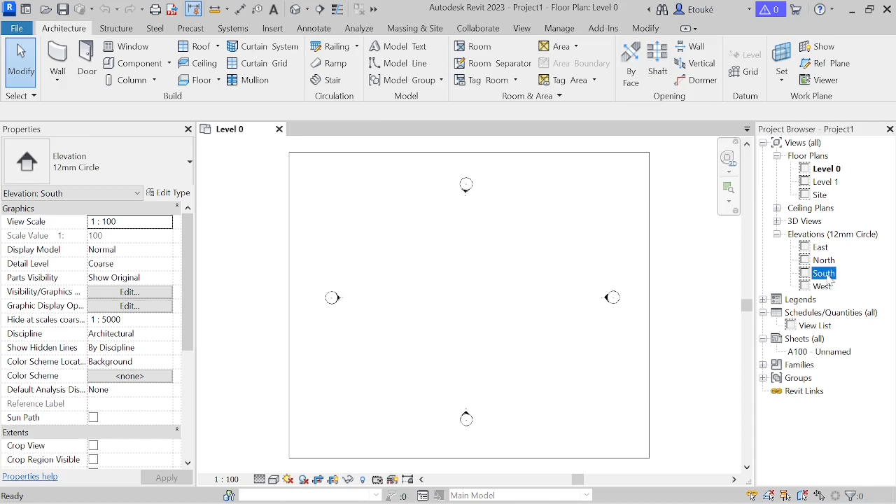So let us start. We will click on not open but a new project. So we will click on OK, and we will just wait a little bit so that Revit can be ready. So now our workplace is ready. What we will do is go to the side view like we used to do, and here we already have 2 levels, and we will add some levels for the slab and for the ceiling.

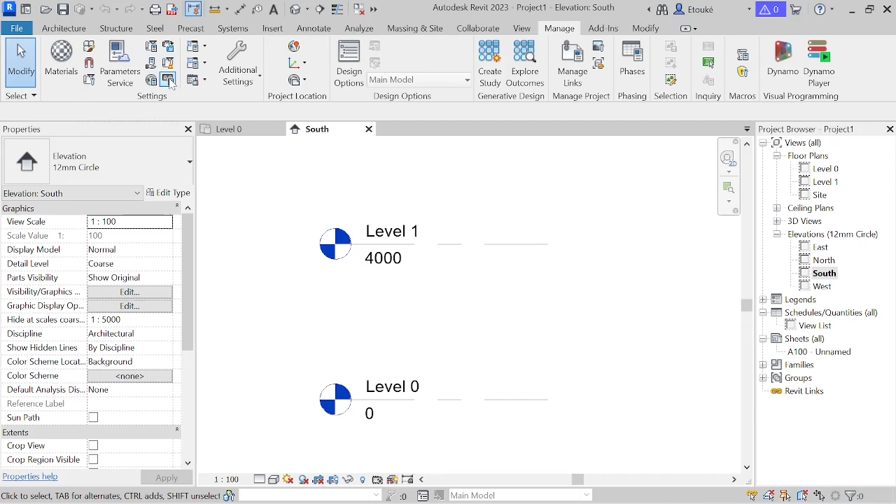So like I used to do, I will change this distance and bring it in meters. So we'll go like we used to do in project units, click on it, come here at this point and change it to meters. So we click on OK and OK again. Now we have it in meters, and we will put some more levels. This distance we can also change or leave it like this.

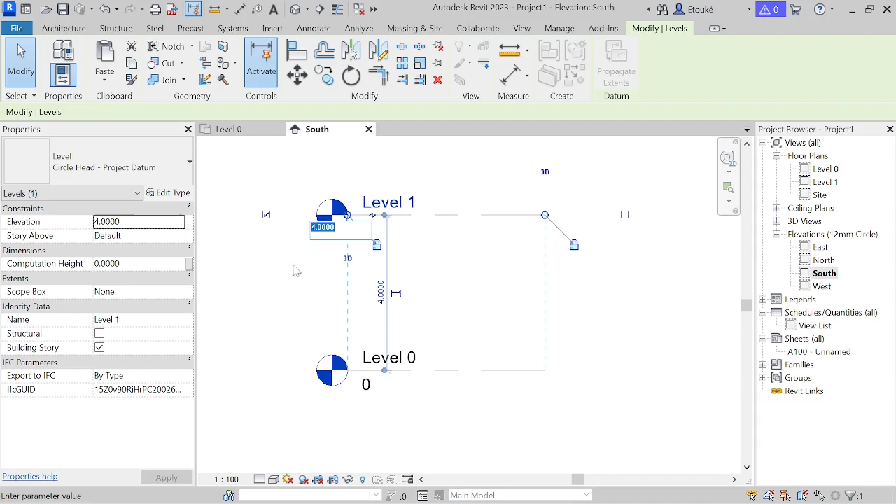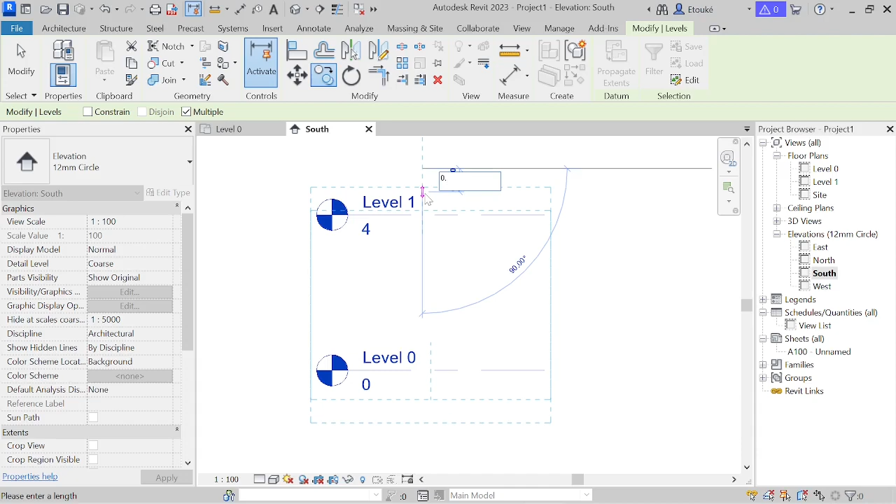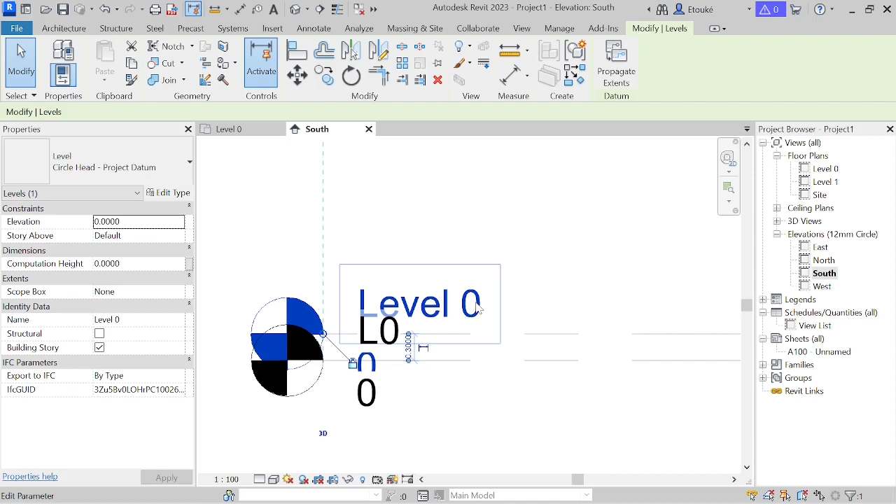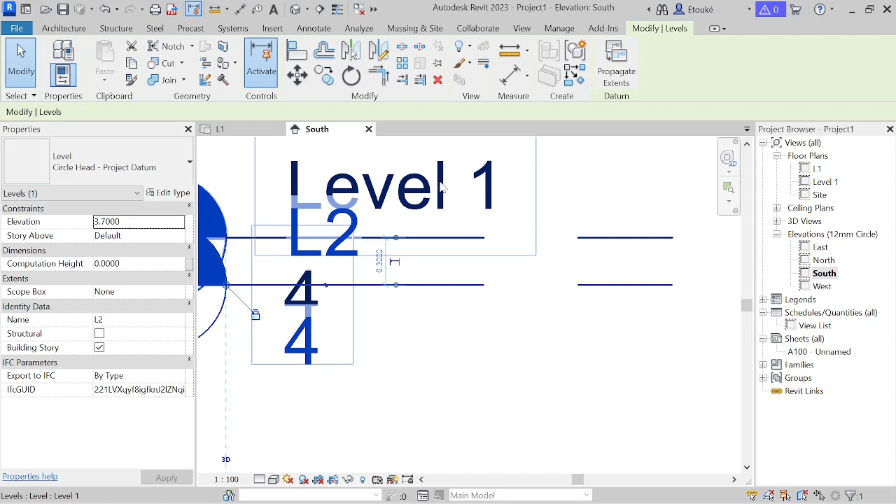And what we will do is copy the level, and we will make the place for the ceiling, so that we can have 0.3, and we click on enter, and we can go out. Now we can also change the name of these levels. So we call this one L0, this one L1, the one here L2, and the next one L3, enter, and now it is ready.

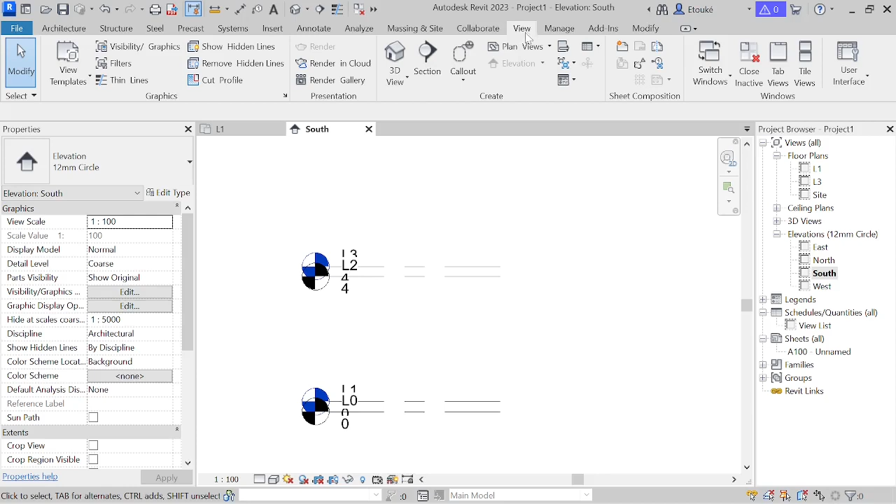So now we can check our floor plan to see if we have everything we need. If we don't have it, we can go to view, click on plan view, and see what is missing here. Yes, now we can see we are missing level 0 and level 2. So we choose the first one, level 0, click OK, and we see our level appearing here. And do the same for level 2, click OK. We also see our level 2 in this place now. So we will close this and check what we have in the side view.

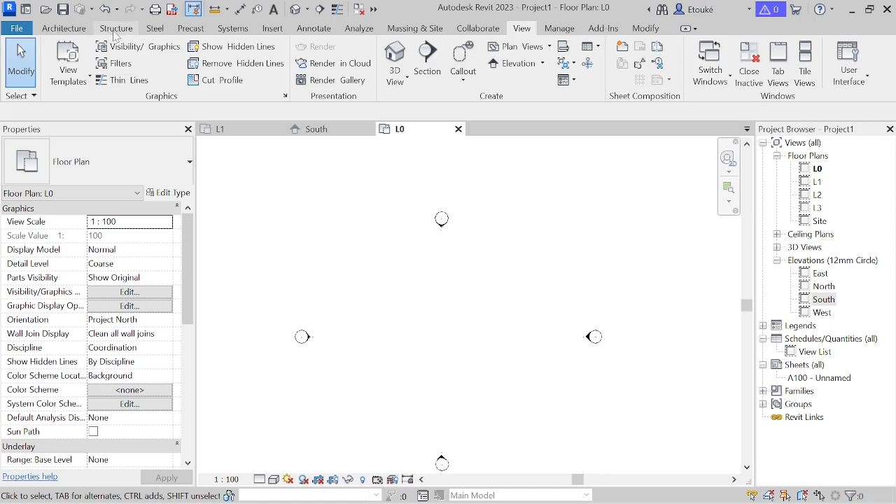So we can go to level 0 to start to design. We will start with the slabs, so we go to structure and choose the slab. We click on the slab and choose the way we want to design it. We want to use the rectangular mode, so we click on it, and then we come here and give our size. We want our slab to be 30 centimeters thick because we defined 30 centimeters in the level. So we will put 0.3 to define our slab.

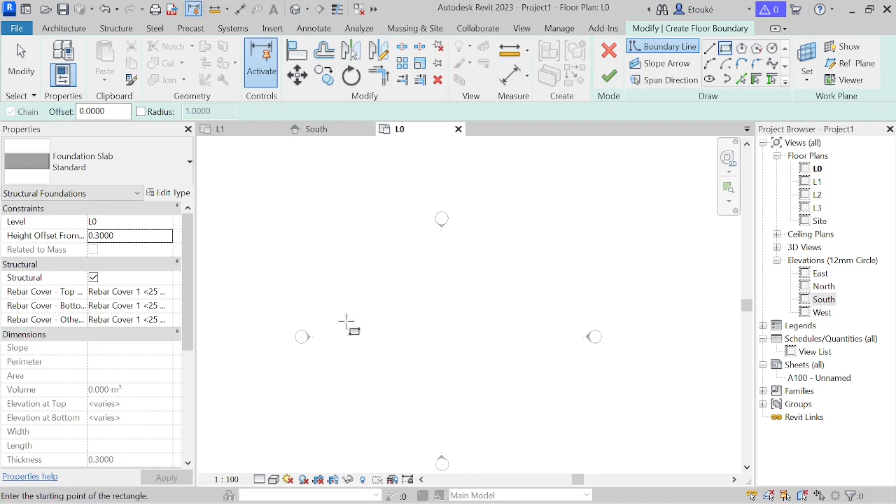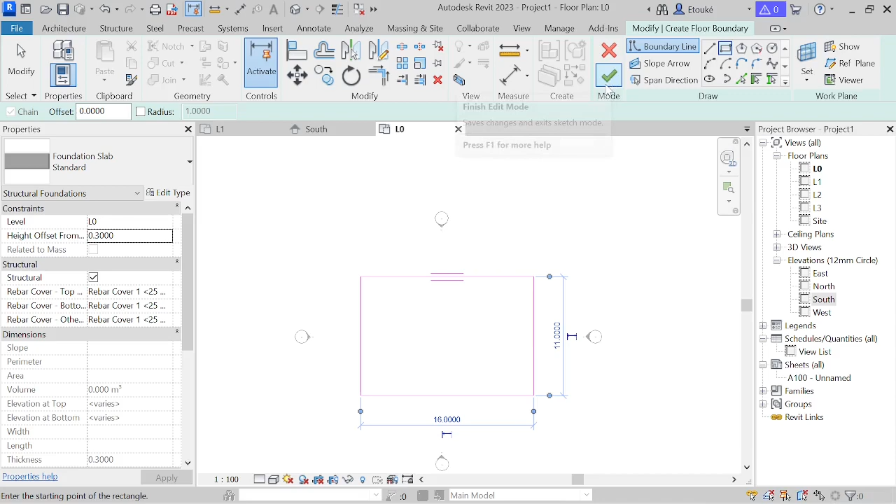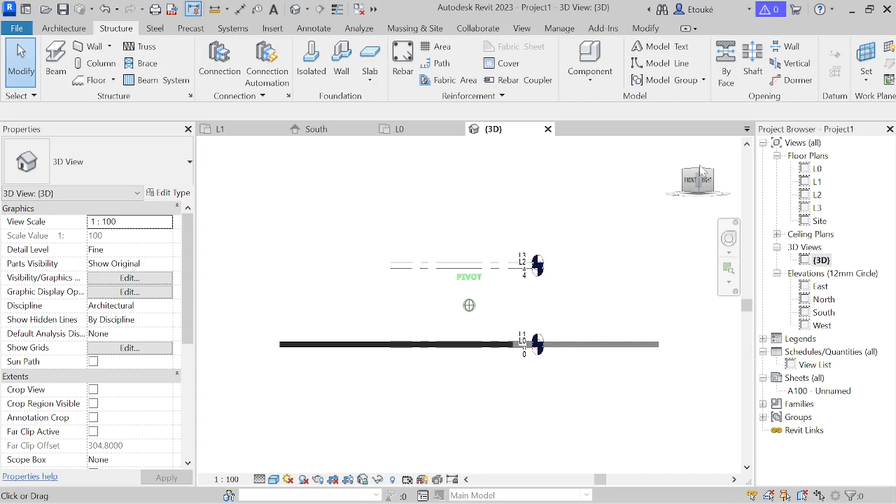So now that we are ready, we can start to design. We can draw here, and when we finish, we can click on OK. So this is our slab. Now that we finished our slab, we can check in 3D to see if the size is okay. So we open the 3D view, and we can check that it is correct. You can also check here, and we see everything is in the place we needed.

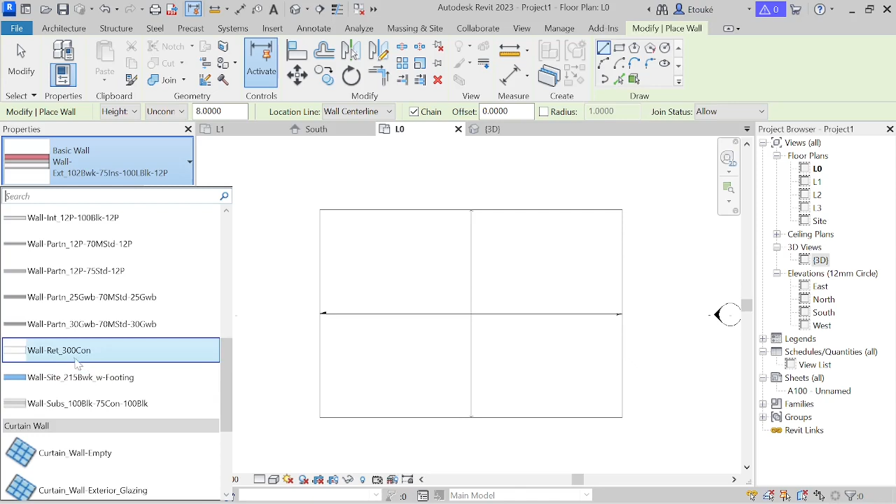So now we go back to level 0. It's time to design the wall. So we go back to architecture and click on the wall, and we can change the material we are using. That means we will choose concrete, the material we want to use. And now it's time for us to choose the connection. That means we want our wall to begin on level 1 and to finish at level 2. So this is what we want, and we can plan it like this.

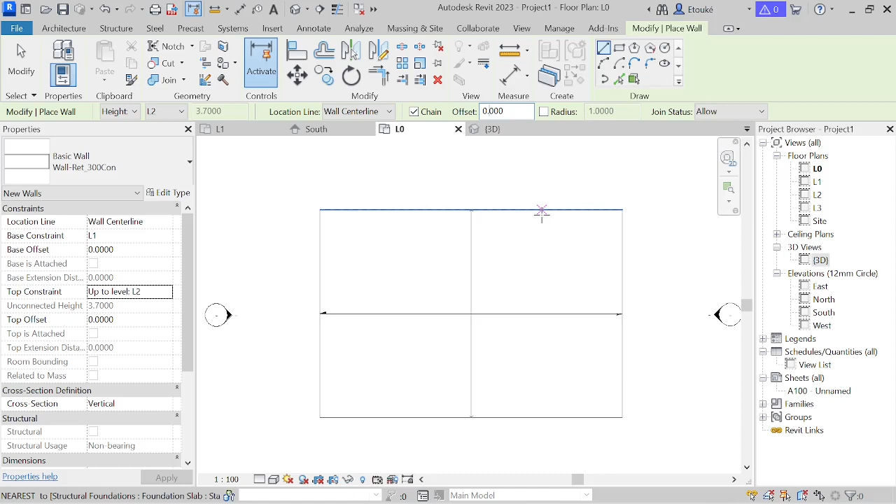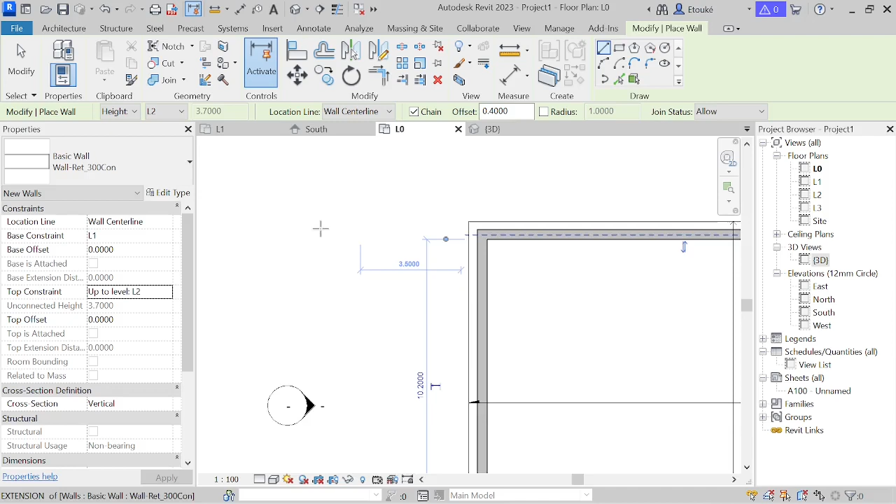And before we start to design, we can make a little bit of space between the slab edge and the wall. So we will give here maybe 0.4, and we can start to design. You see, you can have it here like this, and this place, and we can close it here. So now we have our wall here, and when we finish, we can check in 3D. We can confirm everything is okay, and we go out from the function.

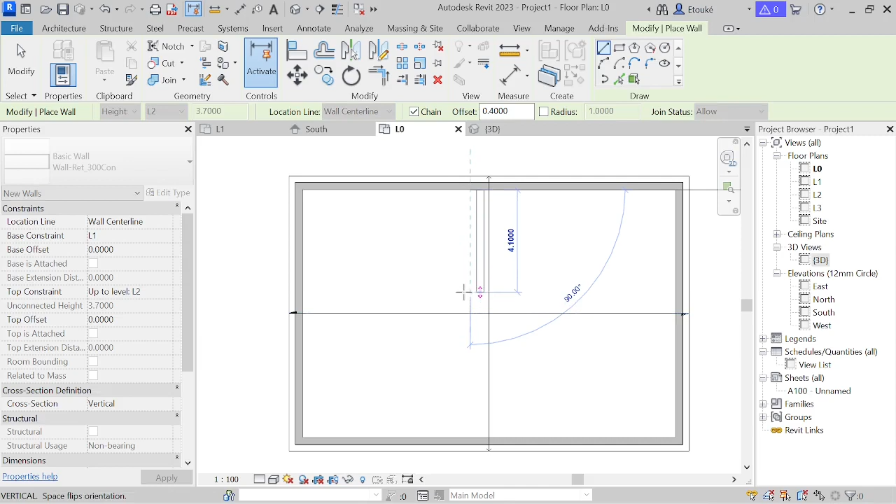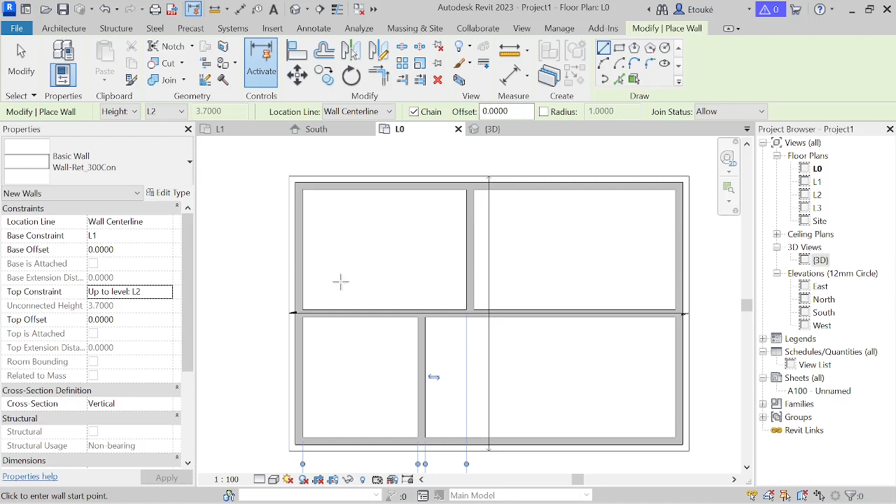We can also put some interior walls like this. We can remove the offset we gave here because we don't need it anymore. Okay, now we have it like this. This will be the bedroom, maybe a bedroom here, and here we can even separate it like this so that we can have more space, and make maybe a flow here.

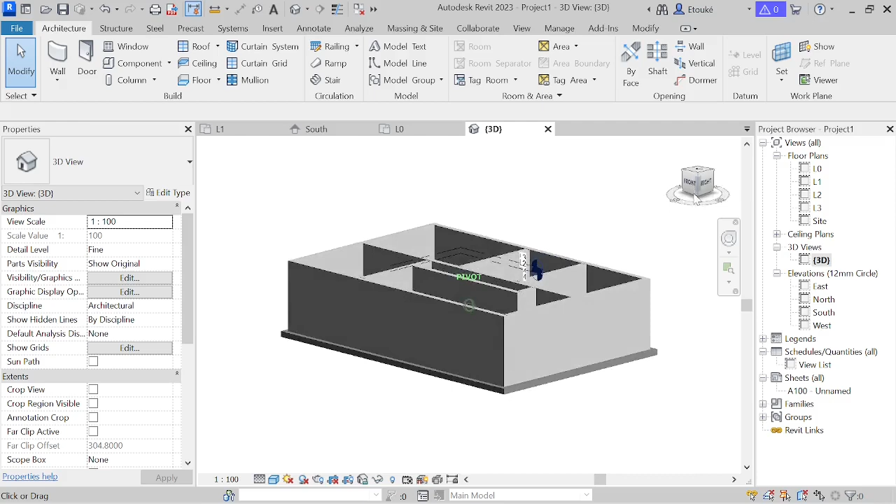Okay, now that we finished this one, we can go back, we can go out from the function, and we will start to make a change. So let us finish with the ceiling first. We will put the ceiling up, and then we can start to change what we want to change. So I will go out. This is how it looks like in 3D. What we just designed, this is how it looks like.

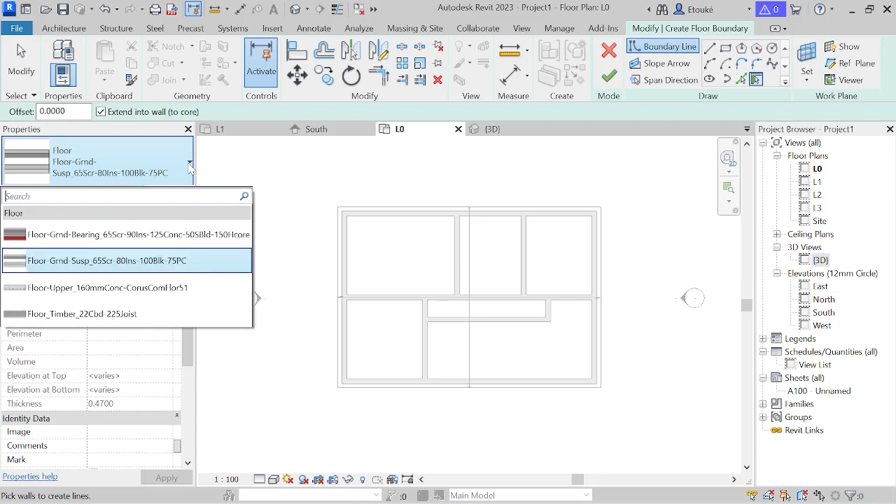So now we go back again to this level, and what we will do is to put the cover, the ceiling that we want to put here. So we will come at floor, and what we will do is to choose our material first. We will choose this one, and we will indicate where we want our ceiling to begin. We want it at level 2. We begin at level 2,

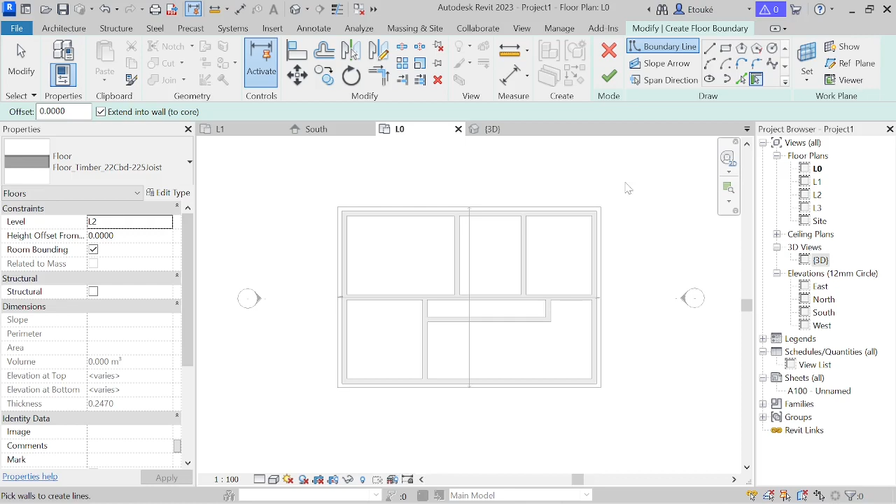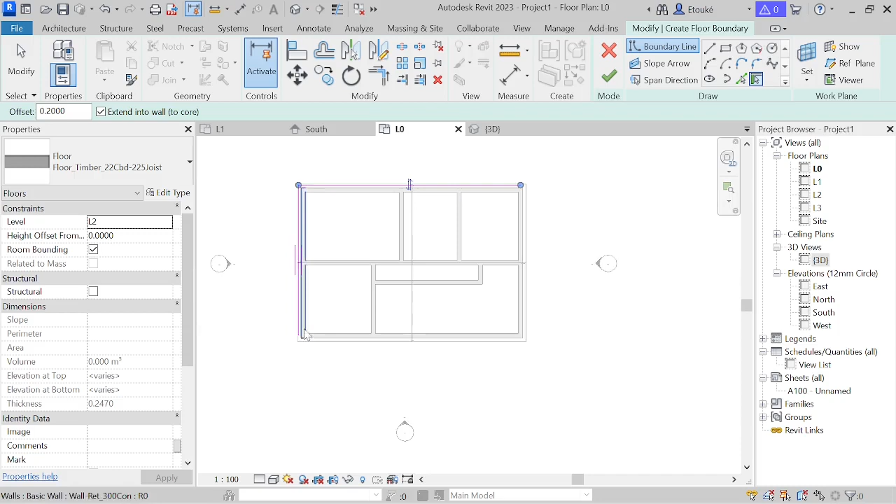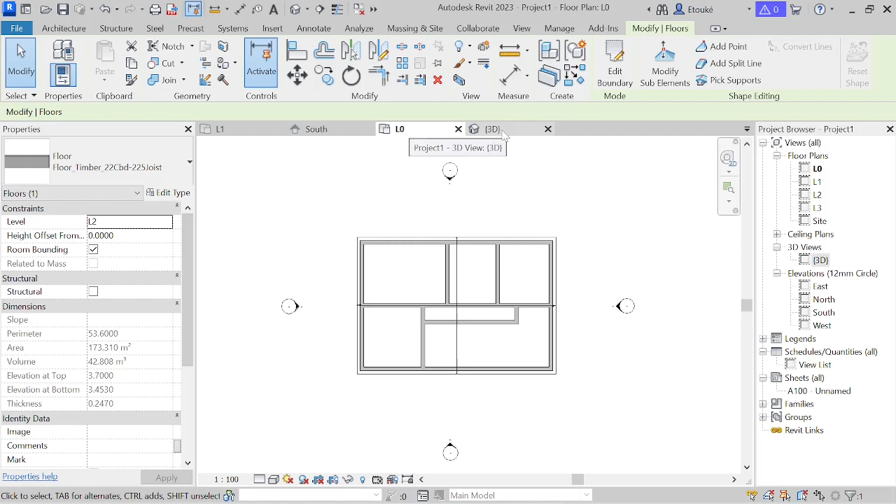and now that we choose it, we can click, we can start, give a little bit space here, let us say 0.2 inside, and now we can start. We can start, and now that we finish, we can click on OK. Don't attach. Okay, now that we have it, let us check what we have in 3D. This is what we have in 3D.

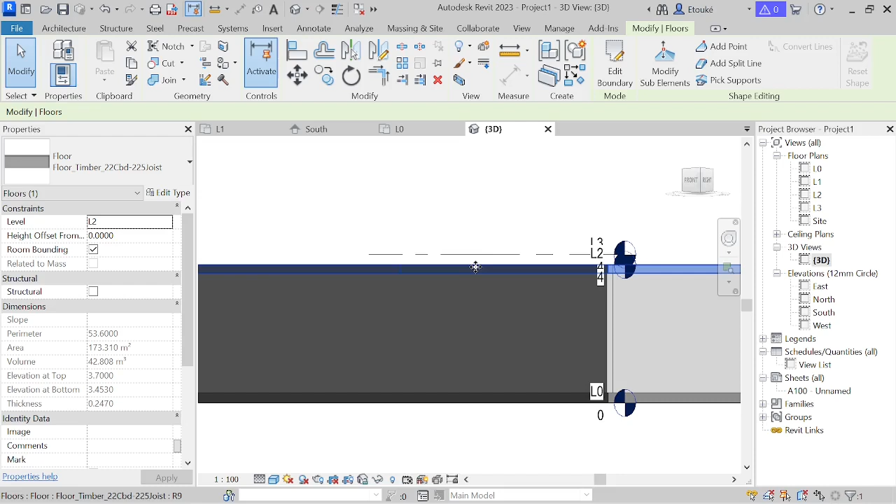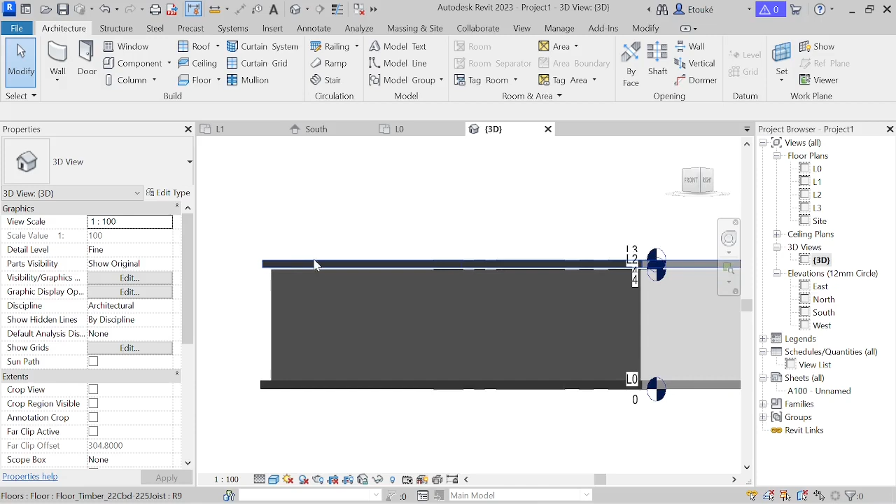But like I said, you realize this ceiling is not at the right place. It's supposed to be here. You see, it's supposed to be here. And this is the first problem we have. So why do we have this problem? This is the first thing we will correct. You see, we have here space between the ceiling and the wall. So this is the first thing we will correct.

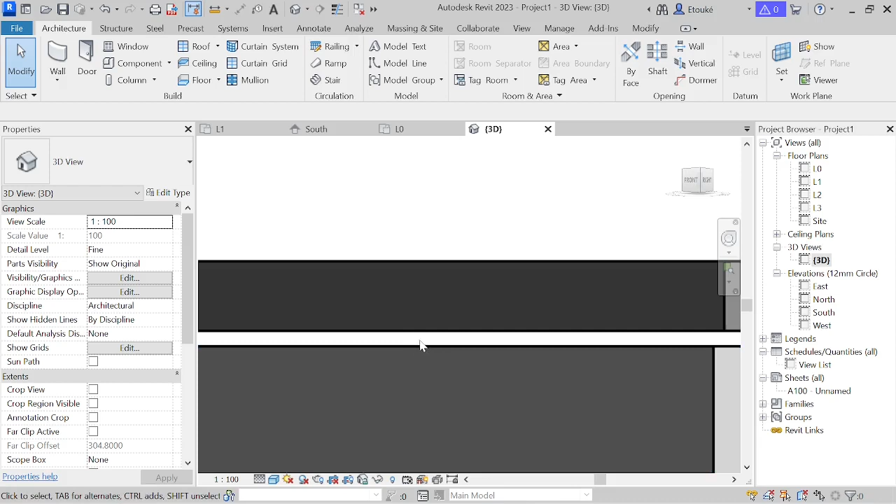We have this problem because our ceiling is not big. The size is smaller than the space we leave here. Here is 30 centimeters. We leave 30 centimeters for the building part, for the ceiling. But now we have, this is not 30 centimeters. So let us check.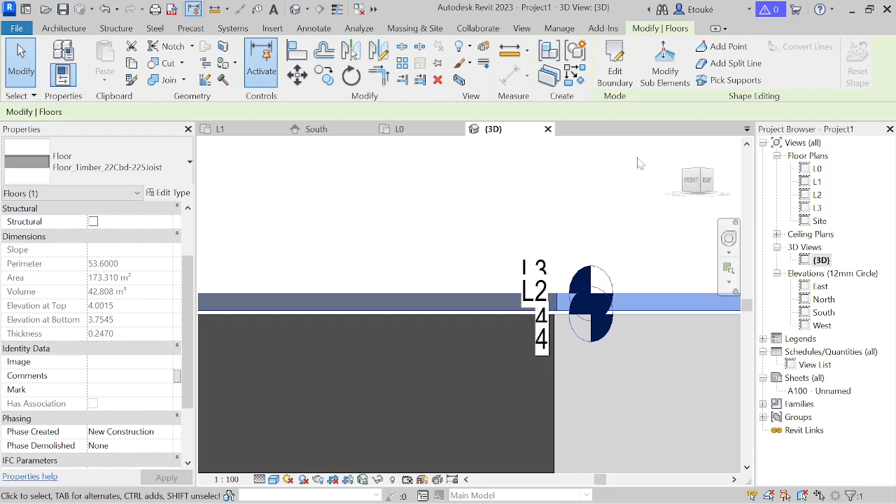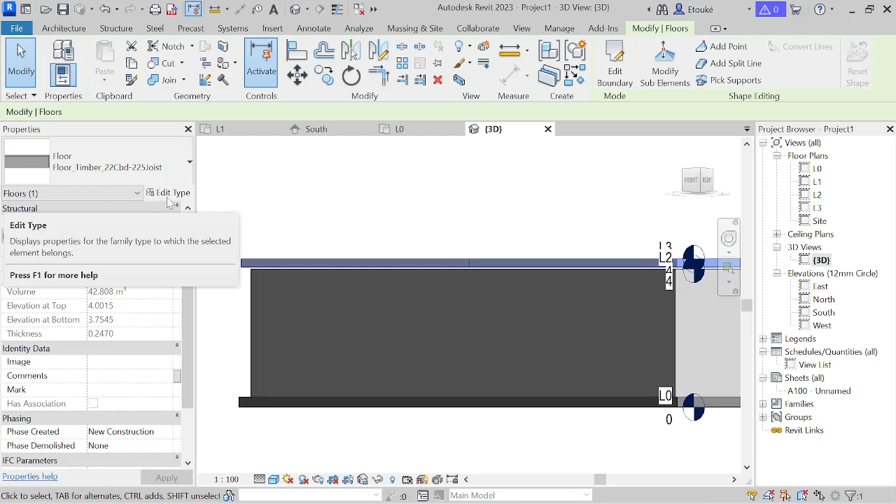Okay, what I was saying is we want to correct this place, and what we can do is to click on it like we did, and we will come at this place here, edit type, click on it, and what you see here is all information concerning our building part. That means the size, the material, and so on.

So we will click on edit, and we want to change the size. What we will do is to give here 29, and here we will give 1, so that everything will make 30. Okay, now that we did it, we can also change the material. That is what I was talking about.

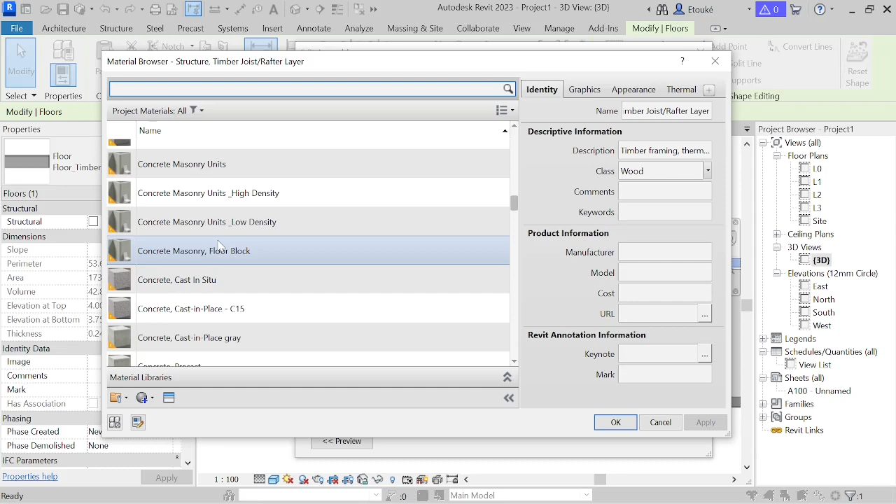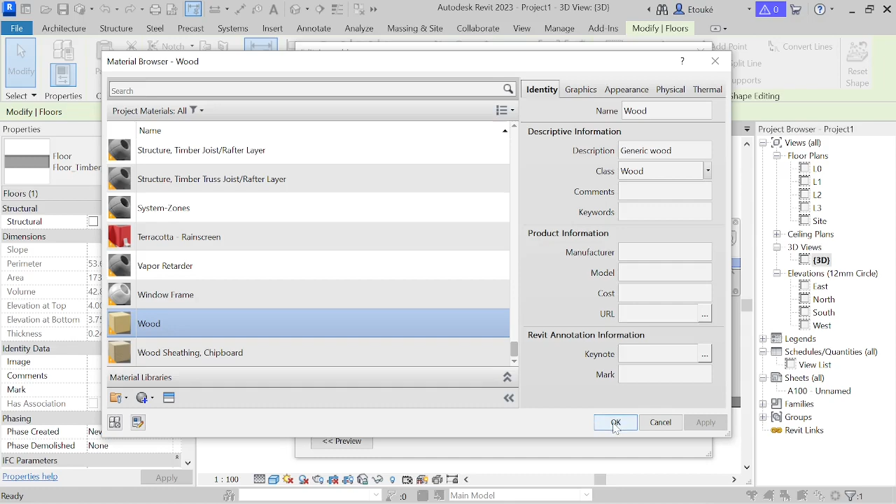We can come here and decide if we want our material to be maybe wood or any type of concrete or plastic. So this is the place we can choose the material. What can we choose here? We can choose something that can make a difference. That means we will choose wood. Let us choose wood, and when we finish, we can click on OK.

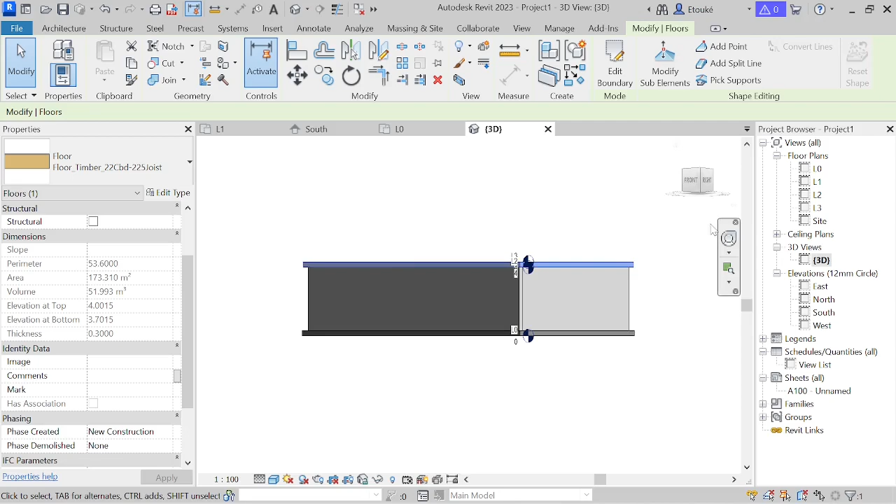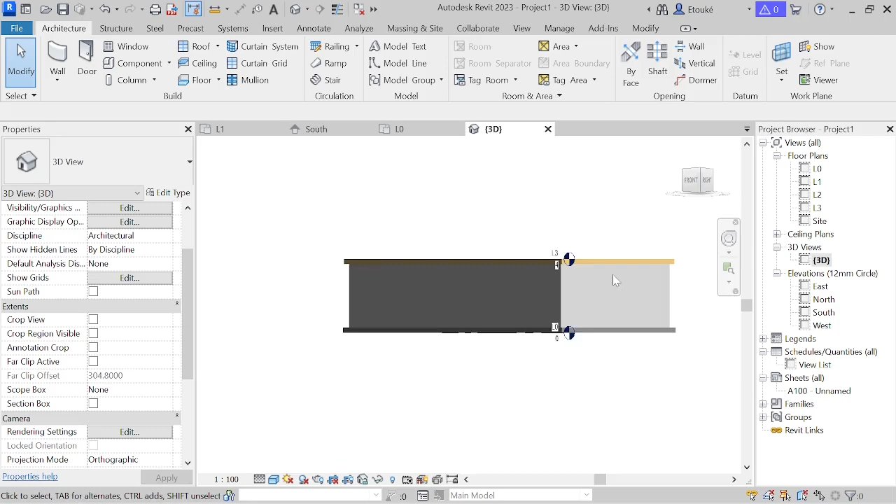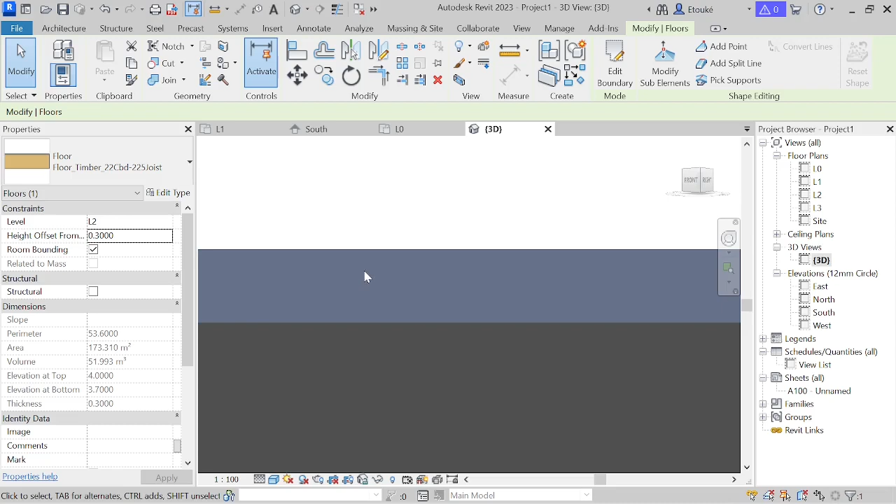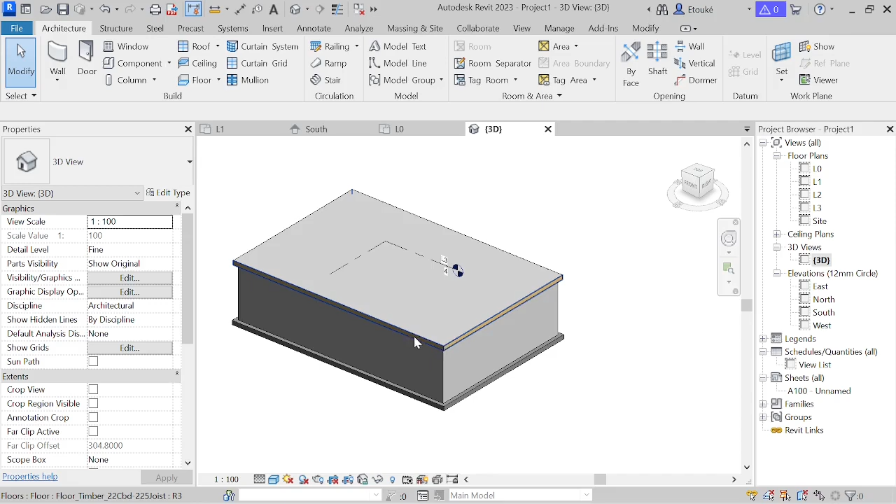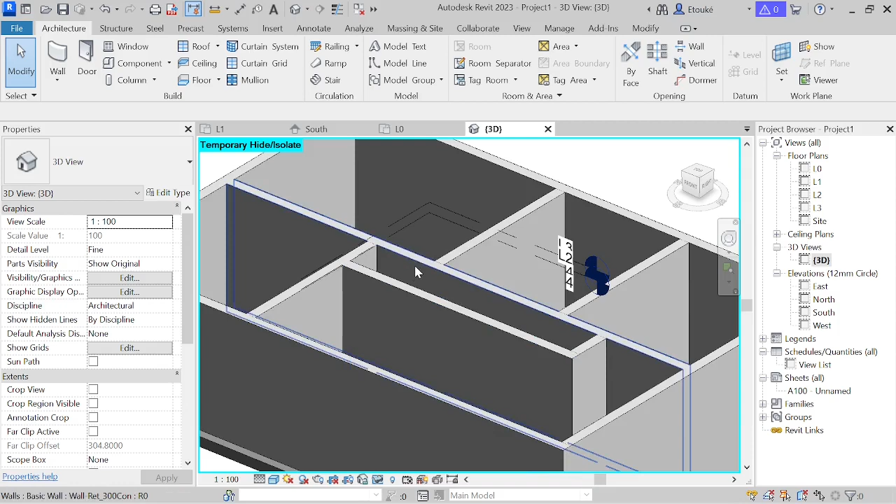And apply. Now you see everything is correct like we wanted. We have changed the material, and we have also changed the size, so that everything is now okay. This is what we have. To work inside, we will remove this cover. To do it, we will come on this function, hide element. We want to remove the element because we want to work inside, so we will hide element, and this place will be removed.

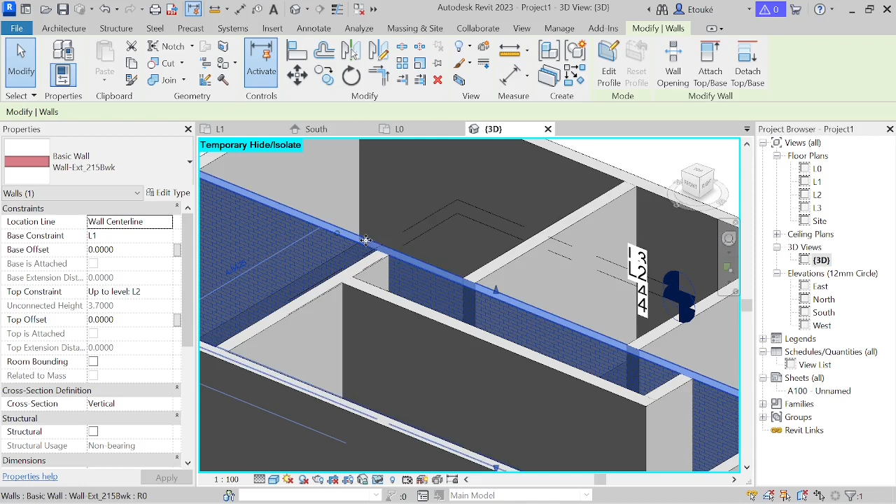Now we want to change the material. We want to change this wall and choose something else. We can change by going at this place. We want to use brick, so we will choose brick, and now you see we have brick here. If I go out, you can see now we have brick here. We can also do the same for this part. We choose it like we did the one before, choose brick again, and apply, and you see this part also changes.

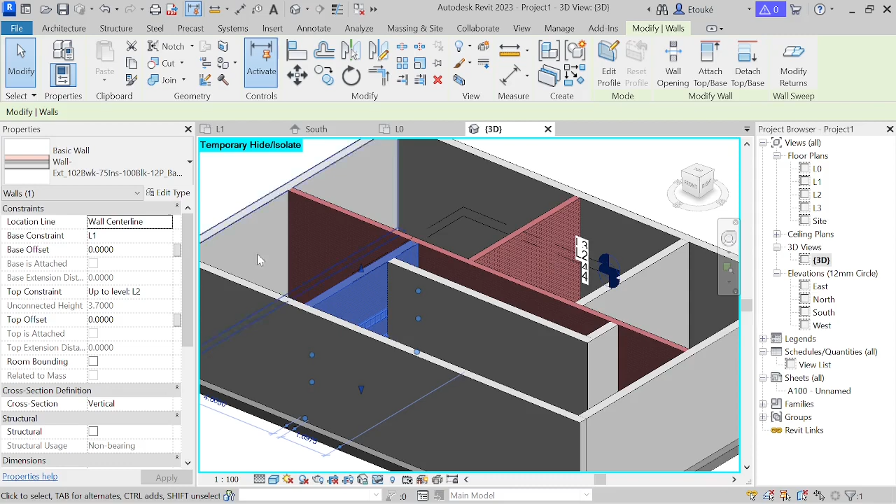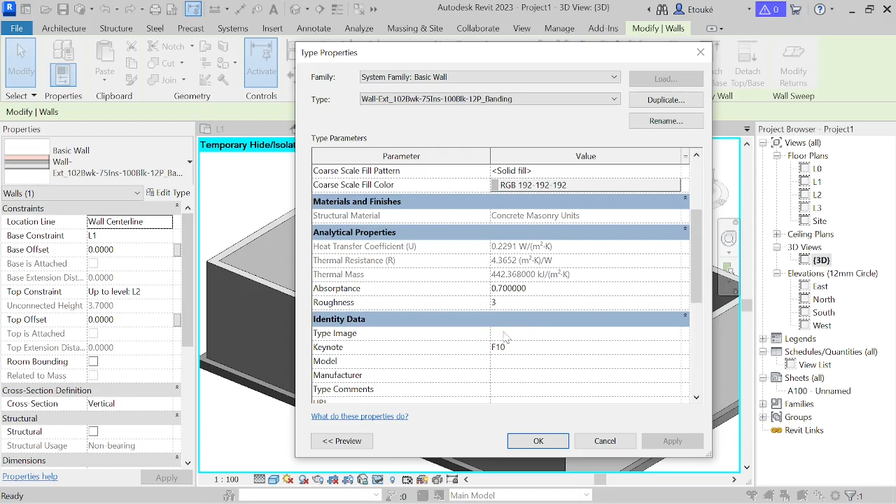We can also change this one and make it maybe something different, this combination, and click apply, and you see what we have here. So that is how we can change. We can even decide we want to change the size of the wall. We click on it, we click on edit, and here we have everything concerning the wall, how high the wall is, and so on. So let us go out a little bit, and if I click on edit, this is all the information I have concerning the wall.

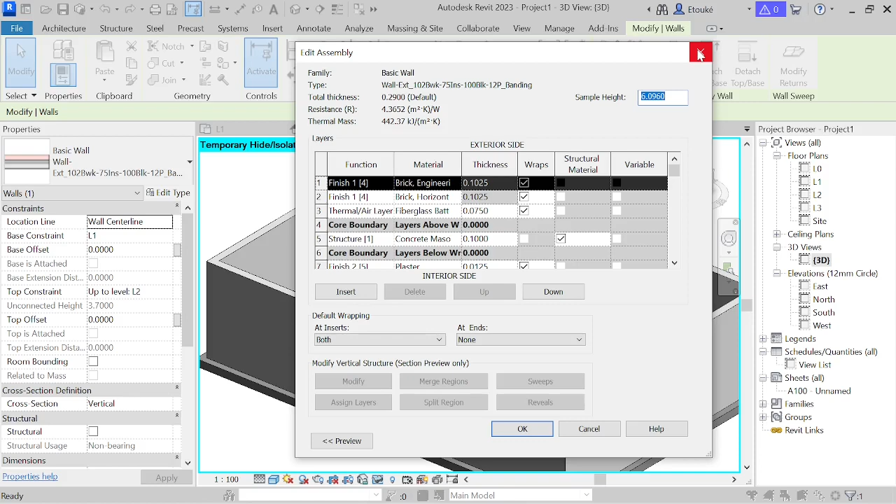Let us go out from this one, and I will click on this one and edit, and now we have any information that concerns this wall. We can change the size, the material we are using there, we can change everything. So this is what I wanted to share with you, how to change the size and the material of the element we already designed.